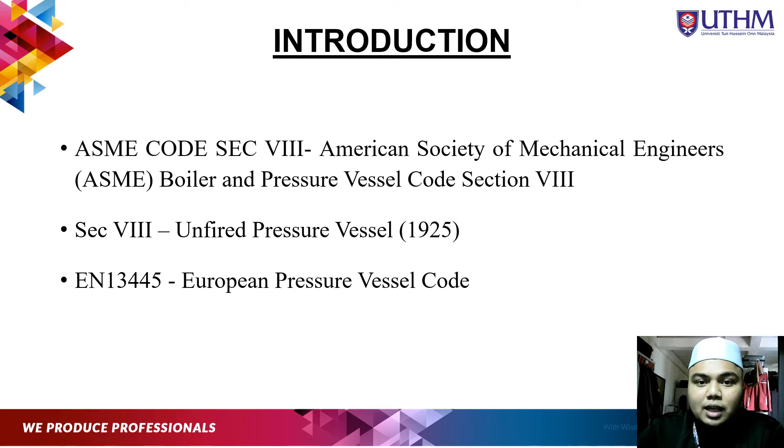Next, what is the importance of code and standard? First is to set the specified rules and guidelines to ensure the manufacturing of pressure vessels meets the industry standard, whether in European or United States industry. Second is to ensure that during production of pressure vessels in industry, a high level of caution and safety is followed.

Then enlist the essential rules, regulations and guidelines that provide direction to all pressure vessel fabricators. Next, we must comply, not only provide but comply, as it can help in avoiding accidents because of an unidentified fault. Last but not least, make sure that their pressure vessels meet the recommended standard and are safe for use in all types of settings.

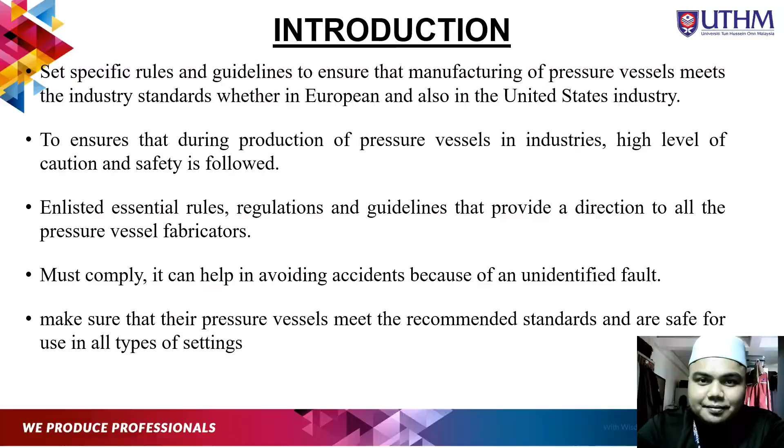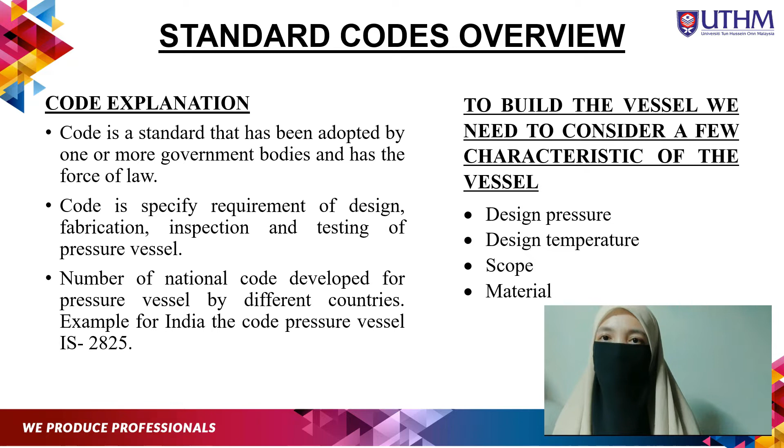AN180001. Okay, I present the code standard for pressure vessels. Code standard presents the law or the rules for pressure vessels. The code standard for pressure vessels consists of design, fabrication, inspection, and also testing of the pressure vessel after we build it. Some countries produce their pressure vessels on their own. When they produce them, they must have a standard code for their pressure vessel.

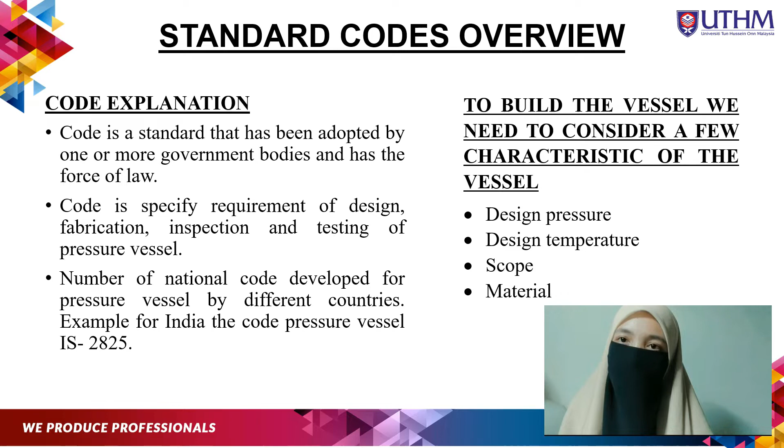For example, India has their own pressure vessels, so they have a standard code, which is IS 2825. To build a pressure vessel, we need to consider some characteristics, which are the design of the pressure vessel, temperature, scope, and also the material for the pressure vessel.

To build the pressure vessel, the standard we use refers to ASME, because ASME provides the characteristics to build it, which are fabrication, design, corrosion fatigue, and deformation of the materials before we make the pressure vessel. We need to refer to ASME, because it is really important to consider before we make it.

Other than that, we also can refer to EN 13445, because EN 13445 also shows us how to fabricate the pressure vessel, the design, the testing, and so on. Additionally, EN 13445 shows the requirements for pressure vessels of nickel and nickel alloy, and pressure equipment made from aluminium and aluminium alloy. So EN 13445 is more specific, but we can refer to both ASME and EN 13445 to make a pressure vessel.

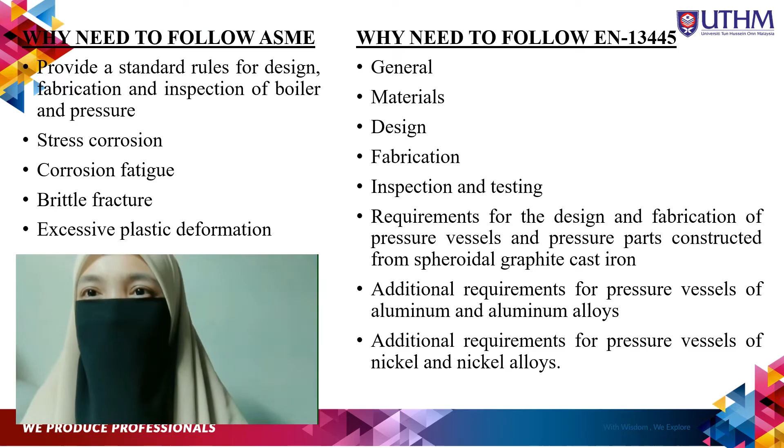AN180296. Now I'm here to talk about the pros and cons of ASME BPV Section 8 Division 1. The pros are it permits joint efficiencies of 1.0, 0.85 and 0.7. Secondly, a good economic advantage, especially for complex and costly vessels. Thirdly, it seems to be the current and future preference.

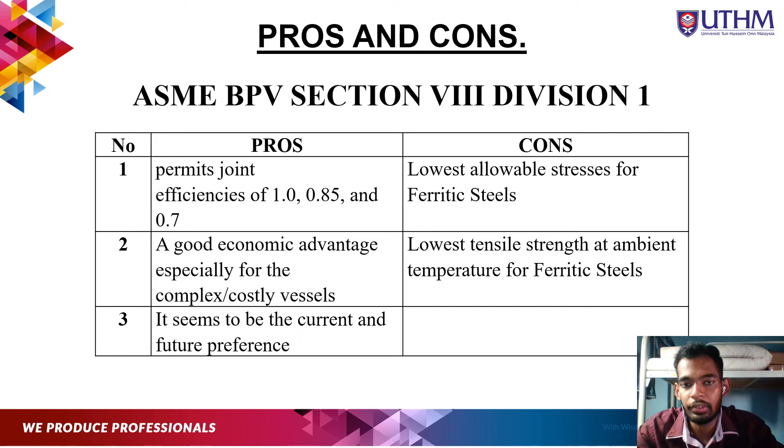Okay, cons of ASME BPV Section 8 Division 1: lowest allowable stresses for ferritic steel. Secondly, lowest tensile strength at ambient temperature for ferritic steels. Second slide, pros and cons of the EN 13445 code. There are a lot of pros and no cons for this code.

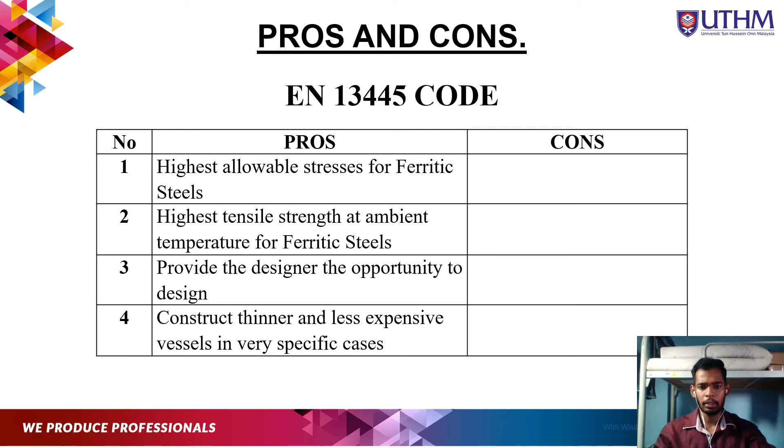Firstly, highest allowable stress for ferritic steels. Secondly, highest tensile strength at ambient temperature for ferritic steels. Thirdly, it provides the designer the opportunity to design, and lastly, construct thinner and less expensive vessels in very specific cases. Let's go to the next slide.

Code parameter comparison. Material properties: carbon and low alloy ferritic steels. An evaluation of the allowable stress basis used by ASME and EN codes reveals some similarities as well as some significant differences. Each of the codes utilizes a 1.5 design margin on material yield strength. However, the design margin on ultimate tensile strength becomes progressively smaller for each of the codes.

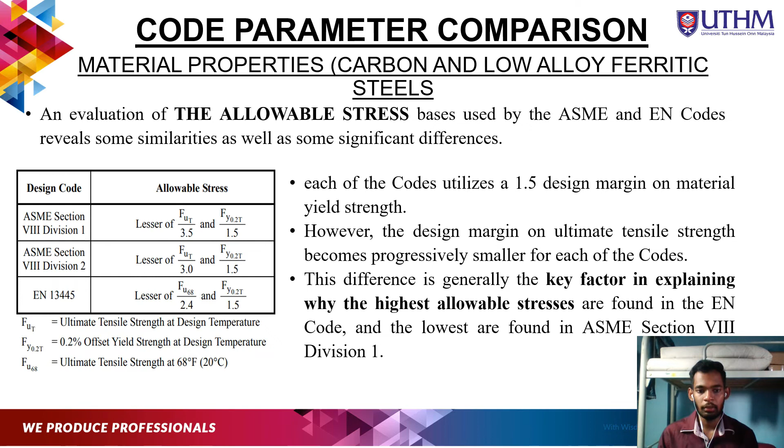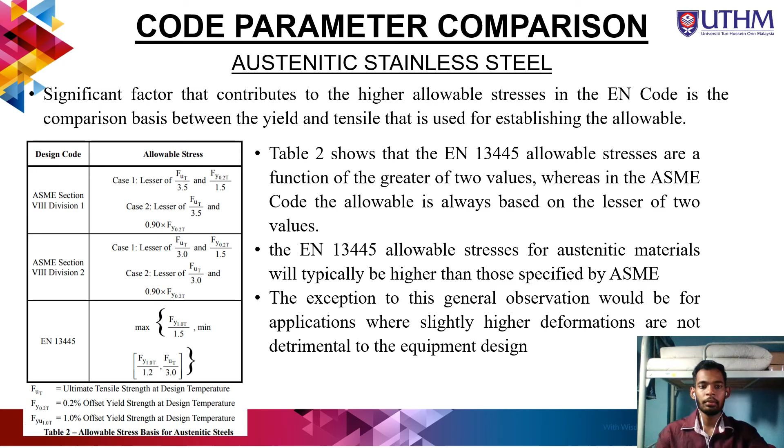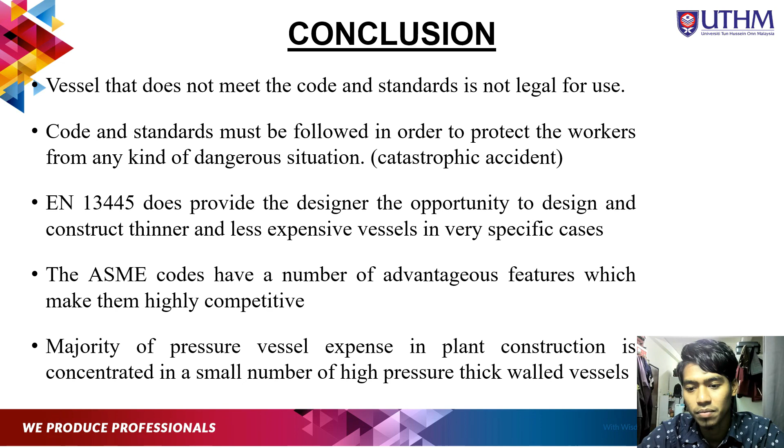Third, EN 13445 provides the designer the opportunity to design and construct thinner and less expensive vessels in very specific cases. Next, the ASME code has a number of advantageous features which make it highly competitive. Lastly, the majority of pressure vessel expense in plant construction is concentrated in a small number of high pressure thick wall vessels. That's all from our group.